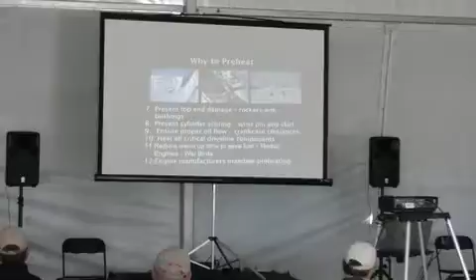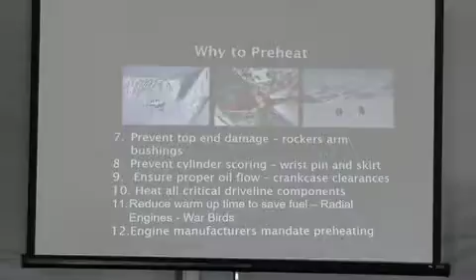And some of the things we don't think about with damage, rocker arms. We do a lot of testing, and you'll see some of the graphs that we've got in here and some of the other imagery that we've done with thermal imaging. But it's up to 15 minutes on a cold soaked engine before you have oil flow at the top of the rockers through the push rods. So you get a lot of damage that you don't see. You think that's just normal wear. If it gets overhauled, spin a bushing.

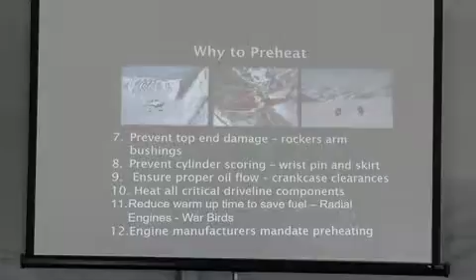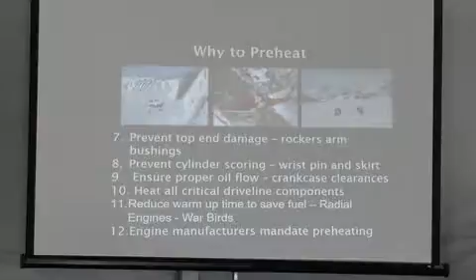And of course, cylinder scoring with wrist pin contact. We've kind of eliminated that over time. They've got better wrist pin manufacturing. And then I have seen skirts get galling on the cylinders from the shrinkage. Of course, proper engine oil flow, and then we heat all the critical driveline components. We use that primarily when we talk about helicopters. We heat everything in the helicopter, the main rotor gearbox, the engines, oil tanks, hydraulic reservoirs, to the tail rotor.

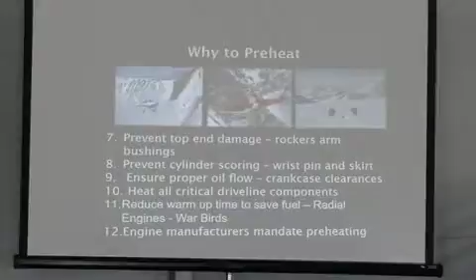And a reduction of warm-up time saves a lot of fuel. One of the examples I like to give is a radial engine, the 1340s that Kenmore Air uses with their seaplanes. They went from a 35-minute warm-up time to 5 minutes. So there's quite a bit of fuel savings, wear and tear, and everything else, because that idle time counts against TBO.

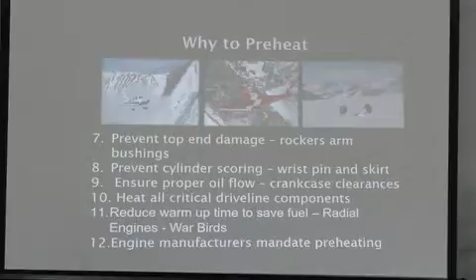And of course, engine manufacturers mandate engine preheat. If you look at the service information letters that TCM put out, Tanis actually helped them write that original service bulletin, which is kind of neat. And then Lycoming as well.

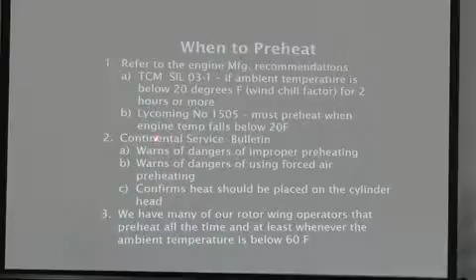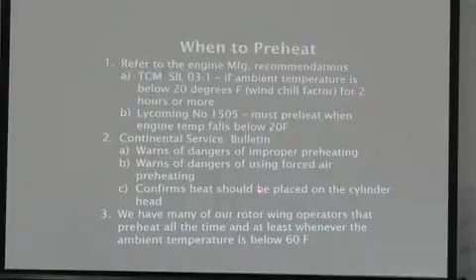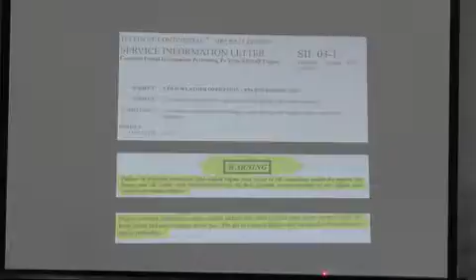And they give warnings of the damage that it causes and the proper types of preheat to use. Continental goes right down to saying that they want to see elements in the thermocouple well, because our first systems, of course, were located in the thermocouple well. Now we have elements that screw right in and replace one of the rocker cover fasteners, or you can put it into an intake tube location.

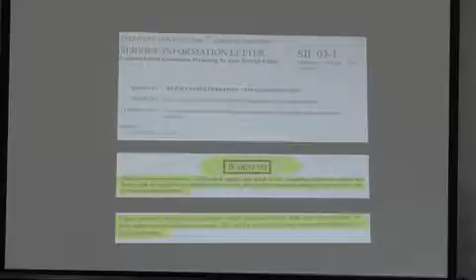And these, of course, are available to you online. You can look them up through the FAA site. Even Lycoming talks about it. Continental goes a little further. They say a cold-soaked engine is an engine that has been subjected to a wind chill of 20 degrees for 2 or more hours. So it could be 40 degrees out. As long as it has a wind chill, they're saying that that's a cold-soaked engine.

So what to heat? To preheat, of course, is a complete engine. All critical driveline components, gearboxes, accessory cases, things like that. The battery and also the avionics. Tanis has had avionics heaters for a number of years, and we just finally redesigned a heater that we've released, and we're doing more certification with that. It's included in all our STC systems with the turbines.

We're doing an STC right now for Kodiak for a Canadian customer, and that's going through completion right now, and that kit will be STC'd with that cabin heater in it. What that cabin heater does is that anything that's a glass panel, it doesn't light up below freezing. So you're essentially starting an engine without any kind of oil indication.

Last time I was up in Canada, I didn't realize I was flying a Saratoga with a G1000. I parked it, thought I was only going to be there for a few hours. The wind kicked up and I left it parked outside, and of course I was in there for 5 hours. I came out and I had to fire that engine up, not having a preheat on it, but more importantly in this particular situation, because I had a cover on the engine, I fired it up. I still didn't have oil indication because of the fact that the panels weren't heated up.

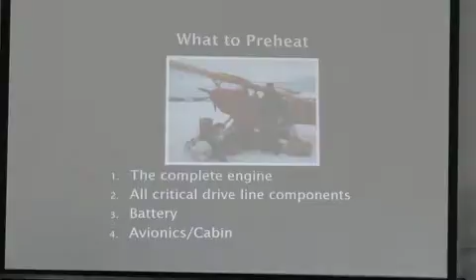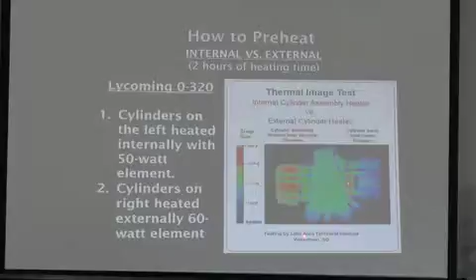So how to preheat? The way we do it is we heat the cylinder heads. This is a 4-cylinder example. It was done by Watertown. This wasn't us. This was done a number of years ago with a competitor's preheat system, a band system that was external, and you can see the difference in the heat rise. We use an element that's only 50 watts that screws into the cylinder head, and this is an example of a 60-watt element that's on the surface of the base of the cylinders.

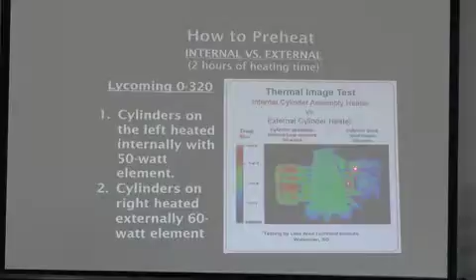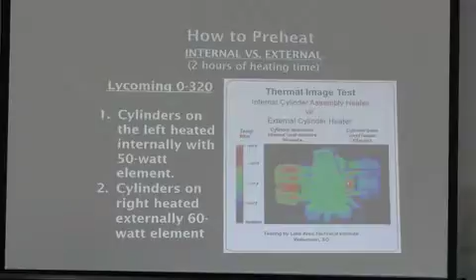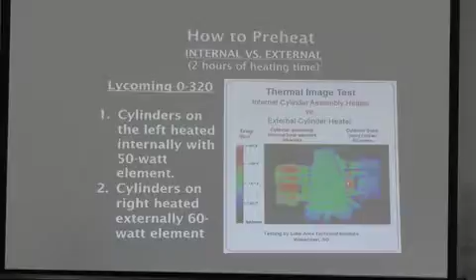Now, we did this testing probably 3 or 4 years before they came along with this, and I did it on my Bonanza. 60-degree morning, spring, I got to 3,500 feet, and we had a monitoring system on the aircraft, and I said, Pete, we're turning around, we're going to land. I'm not going to continue to fly here because the base temperatures of the cylinders had exceeded the TC data sheet recommended or required maximum temperature. So we never went down that path for a number of reasons.

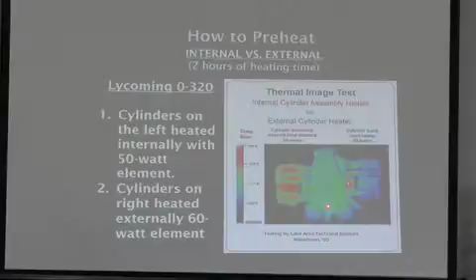The other reason is, of course, we like to heat the cylinder heads, and we'll get into some information on that as we move on here too. Other things to consider, depending upon how cold it is, and I've got some graphs that will show the difference, we get an additional about 40-degree rise over the engine temperature when you use an engine cover because you're containing that heat. So if it's very, very cold, we have operators in Canada that are certified to operate with their commuter airlines down to -54 with our systems.

Pilatus cannot be registered in Canada without a Tanis system on it. So the PC-12 has to have our system on it here in North America. Our systems, because of the way we design them, we use a minimum wattage.

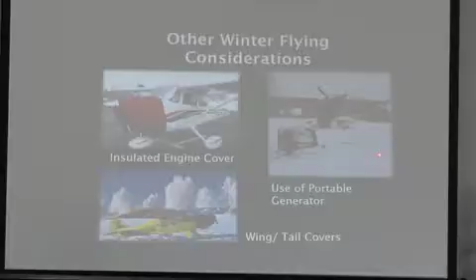To get maximum performance, you can use a simple 1,000-watt generator for a 4 or 6-cylinder system and just run it for 3-4 hours to heat up your engine. And then other things to consider are wing covers and things like that.

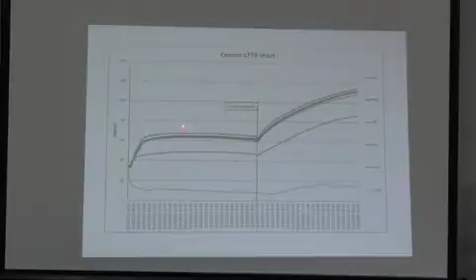Now this is a graph that we did, and we're continually doing testing. Just on a 177, and it happened to have a little 360 in it. What we're trying to do here is we got an ambient temperature, and we have a sump temperature. Then we have the cylinder temperatures here. And what this is a good example of, we shoot for a rise of about 60 degrees over ambient.

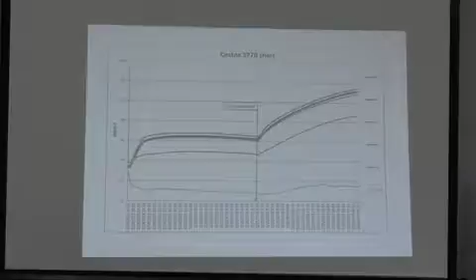We don't use thermostats or any kind of controllers on our system. It's designed for the mass of the engine. We want the excess energy just to bleed off. If we put thermostats on, we get cycling and we get a chance of the engine going through dew point. And when you go through dew point, there's a chance of moisture collecting. So once it's above dew point, you don't have a moisture issue.

And that's the other thing with heating the cylinder heads above the oil temperature. Nowadays, we just want the oil to flow. You got multi-viscosity oils, you don't need the oil to get really warm. You just want to get a temperature rise of about 40 above ambient for the oil. And then the cylinder heads, you want them to be hotter.

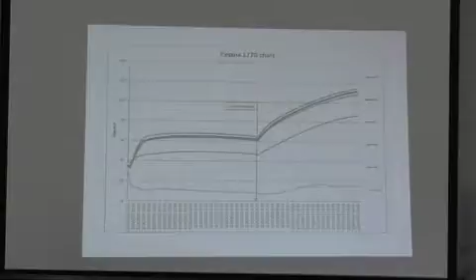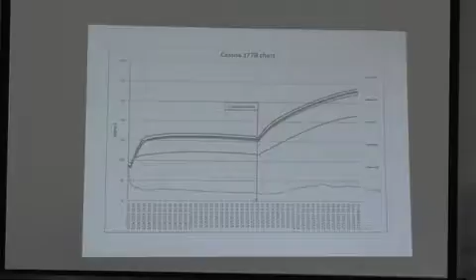We don't want to have a chance of a bunch of heat in the bottom of the engine and then cold cylinder heads, because somewhere between that heat in the center of the engine and the outside of the engine, that metal is going to go through dew point, and you're going to get a chance of moisture buildup and, of course, a chance of corrosion.

Some more graphing here that we did. This happens to be in a different aircraft. We had some extra probes put on it, but you can see the case are the blue ones here, and then here's the oil. So the most important ones to me are to look at the oil. We want the oil at a lower temperature than the rest of the items. We don't want to release the moisture in the oil on the ground. We want you to release that moisture when you're flying the aircraft.

Get the engine above 180, 200 degrees, your oil temperature for an hour or more is what they recommend from the engine manufacturers. Moisture does get in your oil as part of the combustion process. It blows by your rings, it gets entrained in the oil as it runs, so it is there. The preheat systems don't create the moisture, but they can release moisture that's entrained in the oil.

You can't see it. Sometimes you'll see on engines where you pull the dipstick, it looks like a milkshake. That's real obvious that you did not get the engine warm enough to get that moisture out of the engine. So we want you to release it in the air while you're flying, not on the ground with a preheat system.

Preheating that you select, if you have a different preheat system on, call us. I'll talk to you. I've been around doing this long enough. I can tell you how to operate that system. I'm not saying to pull it off. You know, if you have a sump-only system, run it for an hour, no more than 2 hours. Don't leave it on, because there's a myriad of problems that can happen with just a sump-only.

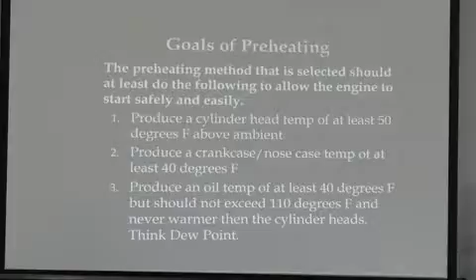We get associated with a lot of preheat systems. In fact, just about everybody's, I've been told, as a Tanis at one time or another. Everybody's riding on our wake because we've been doing this for so long. We are the first electric preheat system mounted on an engine. So consequently, we get associated with the good and the bad.

So what we're looking for, and I'm pushing the wrong buttons here, is we want to produce a cylinder head temperature of at least 50 degrees over ambient. We want to produce a crankcase and nose temperature and sump temperature of about 40 over ambient. And we definitely don't want the oil to get above 110 degrees.

Now the reason we're giving you 110 degrees, for example, if it's a 70-degree day and you've got that 60-degree rise, you're going to get pretty darn warm. So you don't necessarily need to have the system plugged in.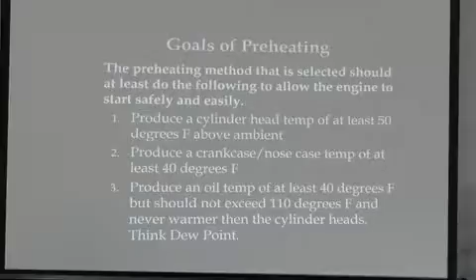Now our turbine systems, helicopters, EMS helicopters, just about every EMS helicopter in the United States and Canada has our system on it. They use those systems upwards to 70 degrees all the time for standby status. That way they can launch in 2 minutes. What we like to say with our helicopter systems is from off to liftoff in 2 minutes. Basically, once that machine is gyroed up, it's ready to launch. In the old days, it was 30 minutes to an hour before they could launch.

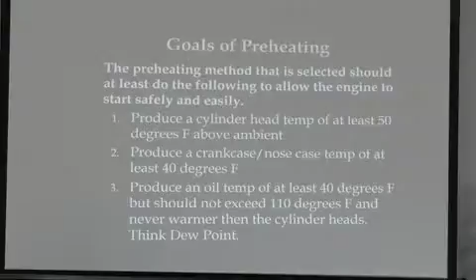This is the fun part here when we get into the idea of people thinking that our preheat systems create moisture. If you look at dew point, and I've got a good graph here coming up, what we're trying to do is get the delta between the air temperature and the dew point. We want to see a large spread between those two items. And I'll show you a graph here in a minute.

Probably the easiest way to think of it is water evaporates at any temperature. It even sublimates when it's frozen. You know, it disappears. So the rate of evaporation is the delta between the temperature of the water and the ambient dew point. So the greater the delta, the faster the rate of evaporation.

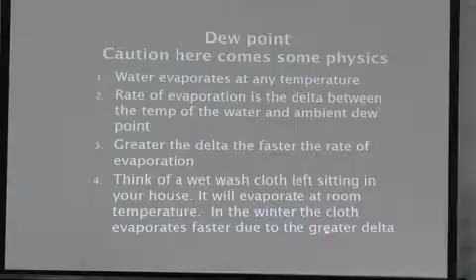So the neatest thing and the easiest way for us here in cold weather to think about is think of a wet washcloth being left out in your house. It evaporates at room temperature. And in the winter, the cloth evaporates even faster just simply because of the delta between the dew point and the ambient air temperature.

Our complete systems keep the cylinder heads and all other parts of your engine above the oil line. So we're talking above the oil line, nominal oil level, above the dew point, so the moisture evaporates, and if it does, it will not condense on the metal inside of your engine. So once you've got that engine warm, leave it warm.

What I like to say is, as soon as practical on a cold day, just plug your engine in. Plug in the preheat system after you get it in the hangar. Throw a blanket, moving blanket, sleeping bag, or if you have an engine cover, put it over the top. That way the entire environment inside of the cowl gets to the same temperature and it levels out. And everything underneath the engine cowl, even if you have a battery mount on the firewall, then gets warm.

We've designed our system in a way to heat the engine completely, so you can leave it plugged in all the time. There's a lot of misnomers out there that you can't. Our system is designed to be done this way. That's one of the reasons we've gone ahead and done the STC. Our system's not required to have STC, but we do that so we can sell in other countries, and it also tells you that we've done the engineering properly, and now we have a completely airworthy system.

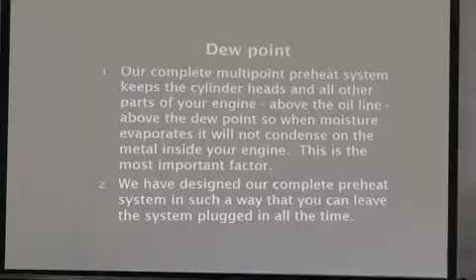Every component, right down to the connector and the wires. The wires that we use in there are 260 degree. It's Teflon, cage coated, mil spec. It used to be proprietary to Boeing, and just recently they released that, so it's got an abrasion rating and everything. The connectors are certified at 200 degrees centigrade. And I could probably go on for quite a while boring you with that part, but I'll skip that.

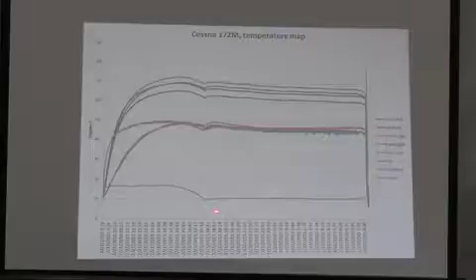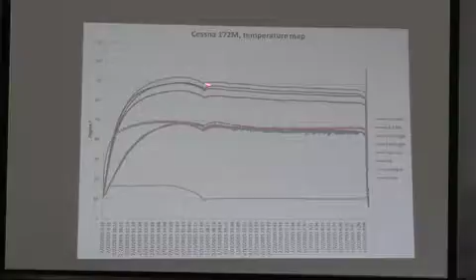There's another temperature graph that we did on a 172, and here we've got some information. This is the ambient. Our cabin heater is here, so it's kind of mixed up in this. And then these are your case and sump readings right here. So your oil temperature and the bottom of your sump and the cylinders. Again, we have that spread, and that's what we're looking for.

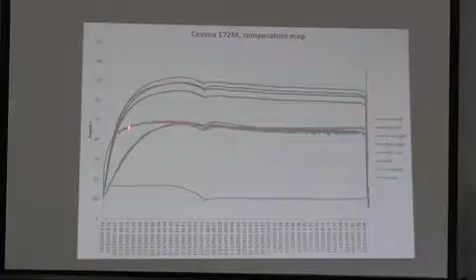It's critical enough to where this graph is kind of interesting. This was done in a hangar, and it heated up, and somebody opened the hangar door, so you see the dip in the temperature here, and then the slow rise again, and the hangar door was never closed.

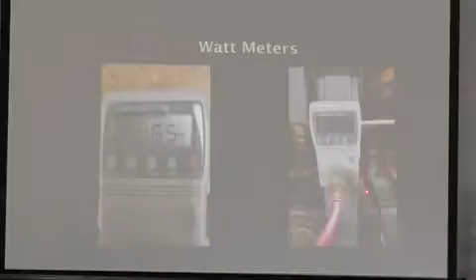One of the ways you can check the health of your system, we have simple meters now. Our systems don't use a lot of wattage. It's not 800 or 1,000 watts on a 6-cylinder, it's 465 watts. And our 4 cylinders are only 240 watts. And they're designed that way specifically.

So some of the FAQ about Tanis aircraft is, does engine preheating cause moisture that results in corrosion? So those are some of the things. If you guys have questions, feel free to interject in here anytime too.

How long does it take to preheat? Our systems are designed to reach a maximum saturation in 6 hours. After 6 hours, that energy just bleeds off. Unless, of course, you put an engine cover on it, then you're going to get another rise of about 40 degrees, depending upon the insulation of the cover.

And an engine cover doesn't have to have a lot of insulation. Just needs a little bit. Doesn't have to be like a big, thick, fluffy sleeping bag. Just needs enough insulation to break that wind so that it's not sucking the cold air through that bare aluminum or composite cowl.

Somebody have a question? I thought I heard somebody there.

How much electricity? How much does it cost to use? Depends on what your charge is per kilowatt hour. But at 12 cents an hour, which most people get charged around here, if you're even charged in your hangar, it's roughly $1 something a day for a 6-cylinder and just under $1 for a 4-cylinder.

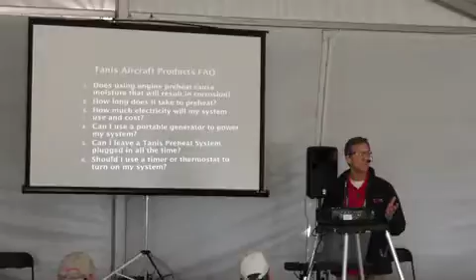On an O-320 engine, I couldn't hear that. What? On an O-320 engine, your system, is that like a 275 watt system? Okay, the question is on our 4-cylinder systems? Yeah. The STC systems we sell now are 240 watts. Your older systems, we had a 50 watt element on the sump, so they were 250 watts. We do have some other systems people have purchased for a special application that might have a little more wattage, but generally it's 250 watts.

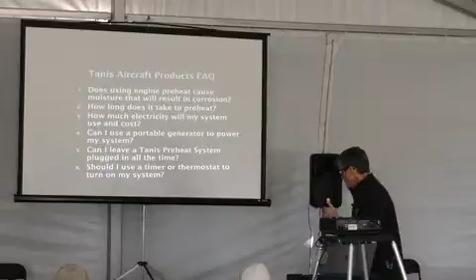And if you go online, everything we've got is available online. All our installation instructions, whether it's a Bell 429 or a little 4-cylinder Continental, are available online. Probably the best thing you can look at is the ICA for the piston engines. There is Ohm's law inside of there, and there's a systems check. It'll tell you how to read it with an ohm meter, so you can do a check on it and record that information in there, and then also print out the operating guide. It'll tell you how to operate the system.

On the front page you can put the wattage, and the reason we do that is because if you sell your aircraft to somebody, and somebody says, do I need a generator, or you forget in a couple of years, what's the generator output I need? What does my system draw? What extension cord do I need? All that information is right on the front of the operating guide.

The reason I asked, we do ice fishing in Oregon, and I have people who went, and we can run two heaters on the generator. Yep. And it works fabulous. Perfect. Well, thank you. Yep. Yeah, you need, say, a 1,000 watt generator. It can put out continuous about 75% of its maximum output. So 750 watts roughly.

Can you leave a Tanis plugged in all the time? We just went over that, and yes, it's designed to be left on all the time. The way we use our systems on the aircraft we fly, and tens of thousands of our customers, when it gets cold, they start plugging the system in. As soon as practical after they land, they just plug it in. I mean, if you're worried about a couple bucks a day, it's only really for 3-4 months out of the year that you're going to be doing that. Some people might run it, if you're in Canada, 6 months out of the year.

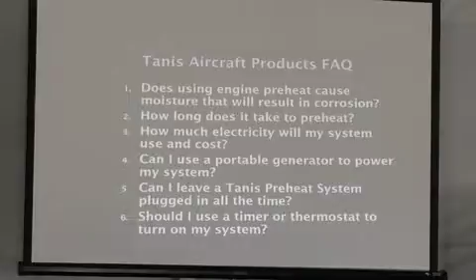Should I use a timer or a thermostat on your system? No. We do not want that thing cycling by any stretch of the imagination. Get it above dew point, leave it above dew point.

Probably the best story I've got is I had a guy call me a couple years ago and he said, I had to tear my engine down. I said, oh great, another one of these guys that thinks he's got a Tanis on and he's got corrosion. He says, no, this isn't a bad story. I got a Comanche with a 540 in it, and I'm in the military. And I got stationed over in Europe, and I didn't come back for 3 years.

Before I left, I'd had my aircraft plugged in with the heater going. And at the time we had a VBR, which just circulated air through the crankcase. He left it on for 3 years. And the reason he called, he wanted to let me know, his mechanic called and said, how did you preserve this engine? It's in perfect condition.

You just shut it off in the hangar, you didn't put any special oil, you didn't do any preservation at all, and here we've got an engine that has absolutely no corrosion, all the gaskets are so flexible and everything. Only reason it had to be torn down, it had a crankshaft AD.

But don't use a timer, don't cycle it. Don't use a thermostat, most importantly. Most thermostats have quite a variance. If you want it to come on at, say, 40 degrees, it's really coming on at 45, or at 25 and turning off, or 35 and turning off at 45. So it's going to be dipping, and we don't want to see that happen.

If you want to use some kind of a cell switch or something, that's fine. Not everybody flies enough to take advantage of it. Here in the winter, if the engine's frozen, obviously if there is moisture that got into the engine somehow from flying it, it is not going to rust because it's frozen. But again, the way I recommend it, just get rid of the gimmicks, make it simple, and just plug it in and use the system.

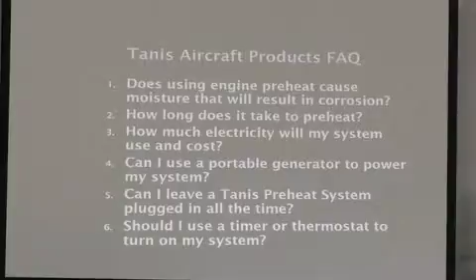I got a question. I don't fly a lot in the winter. Sometimes it goes a lot of weeks. When I get to the flat, in the hangar, put a cover on it, plug the Tanis in. But I got one of these deals I can call off my cell phone. I'm going to fly today and I turn it on for 6 hours or so. Is that okay? Perfect. Okay.

If anybody ever has a question, even in the summertime, when you go to check your oil, you see water dripping on the filler or on the dipstick. If you're worried about it, like a Lycoming and the Continentals that have the oil dipstick on the filler, just loosen it up and cock it off to the side, throw a rag over it or something like that. You're going to pre-flight it and you're going to tighten it up anyway. But that'll let anything expel. And that's usually what I tell people to do if they're worried about it.

So we talked about how long it takes to heat, 6 hours. The Continental service information letter they sent out said they don't want to see a system plugged in more than 24 hours prior to departure. That's because they're covering every preheat system that's made out there. They cover their backside.

Continental's now working with us, not only with their diesel engines, but with installation at the factory, not just at Cirrus, because they're owned by the same people now, but at all the other manufacturers. So they want to start recommending our kit, and we're hoping to see that come to fruition here pretty soon.

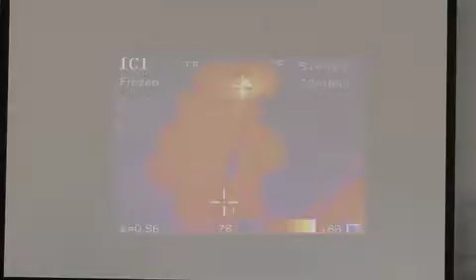So we continually, yes? Did I miss one? I haven't done this in a long time. Usually Doug does this. Which one?

Our systems are designed, even the helicopter systems, to get the rise of the item being heated to about 60 degrees over ambient. So I shoot for, when I'm doing my engineering, between 50 and 70 above ambient. I'll give you some examples. We did some work on the Q400, and then we did the Q300. Bombardier sold some to Russia. But the requirement was, before they purchased the aircraft, 4 of them, they had to have Tanis systems on them. So we sent our systems we designed, and on this particular aircraft, it was with the Pratt & Whitney 150s, which is a pretty good size engine, and the batteries they wanted heated. So we sent our system over. They were installed in Bermuda, of all places, and then flown up to Siberia, and they did the testing. Our systems heated the stuff up at minus 44 within 1 degree centigrade of what our design parameters were. So we do a pretty good job with that.

And they had to have 3 batteries heated on that. So they've got an emergency backup, an avionics battery, and then a primary battery for start. So to answer your question, we're looking for about a 60 degree rise above ambient. The additional heat just bleeds off, unless you're sitting in the wind or something like that.

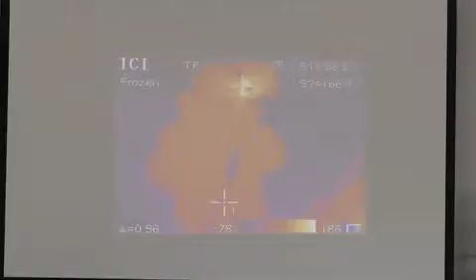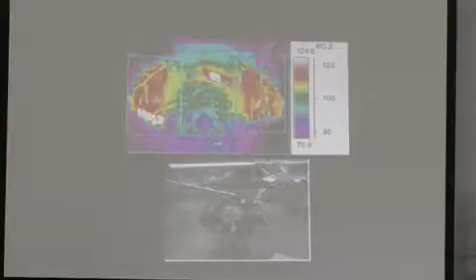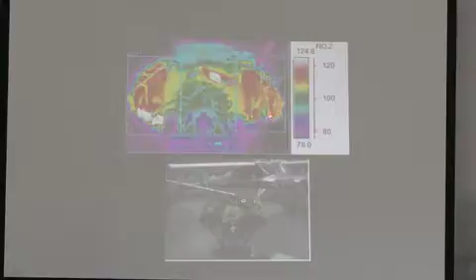We're continually doing testing. We just purchased a new high resolution thermal imaging camera, and we're doing a little more testing with that. This is one of our older cameras. Right here, Bulldog gave us a pair of engines to work with, and we're doing some testing on it. It's a 520 out of a Baron that the guy had overhauled, and this is on the floor. It doesn't go in the Luscombe in the background. I'm sure the guy would love to have that in there, but you can see what we're heating with the cylinder heads. This is just looking head on at this engine with the thermal imaging camera, so you can really see where the heat is. We can't see the underside because it's shadowed, so it's not reading, but there's the top element on the top of the case. It's located right here. And then, of course, the cylinder heads. So we want to know what our systems are doing.

Some of the things we've changed our system with here, we've done some improvements. When I came back to the company 8 years ago, I said, we've got to change the wiring and we've got to change the connectors. And so we spent a couple of years researching and finding better wiring for that, better cabling, and of course sealed connectors to get rid of the old spade connectors that we had.

When we started this, engines didn't have wiring except for maybe ground leads for mags, ignition leads, and maybe something going out for an oil temperature sending unit. That was about it. Now we have a myriad of wires running in the engine compartment. So it's been an evolutionary process, and the requirements are much higher than, say, for an automobile. So a lot of these components aren't readily available. They have to be specially made. So that's one of the things that our system has evolved to do, is to compensate for that.

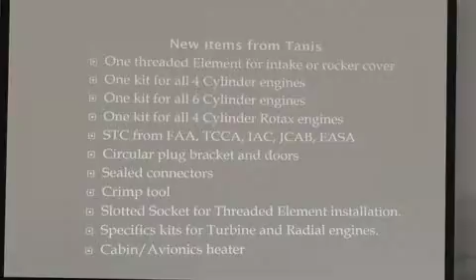And it's allowed us to reach into and become part of the commercial market. So we're not installed just on GA aircraft here in the US, where we started with small piston. We're installed on all the Canadian government's aircraft except for a few of their jets, from 172s that they fly to the BO-105s, and now the 412s that are going on the icebreakers.

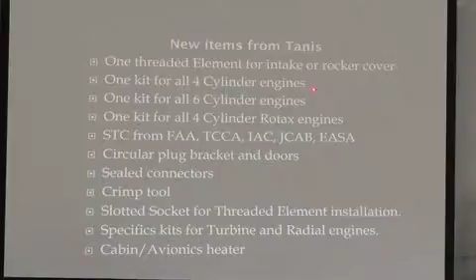So one of the things we did here recently was I did a complete metallurgy. How can I say that here? Went through the metallurgy of the bolt that we had, and I found a better way to make it. And we came up with a CNC process for making all of our threaded elements now that replace the thermocouple CHT element that we had, and also the intake tube bolt.

It's a better material. It's increased the strength of it by twice. So it's twice as strong as it used to be. It's a stainless steel 17-4 material. It's an aerospace fastener material. Costs us a lot more to make, but it's a lot better part. And of course, I talked about the wiring and the connectors that we've done too.

We now have one kit that fits all 4-cylinder air-cooled engines. And we also have only one kit that fits the 6-cylinders as well. It leaves all the CHT wells open. It's STC. It can be sold in Canada and EASA installed around the world now. EASA approval, of course, is a European approval.

And then we have one kit that fits the Rotax, whether it's a 412 or, I'm sorry, is it 912 and 914? And now, of course, we have STC approval from the FAA, Canada, Russia, Japan, and EASA is our latest one.

We have some accessories you can purchase. We have sealed circular plug brackets for the Lycoming, which is real common. And then we also have 3 or 4 different doors that are structurally sound that you can put in with field approvals if they're not already included in the STCs. All our connectors are sealed now. We have special crimp tools that are inexpensive you can buy from us to work with our wiring.

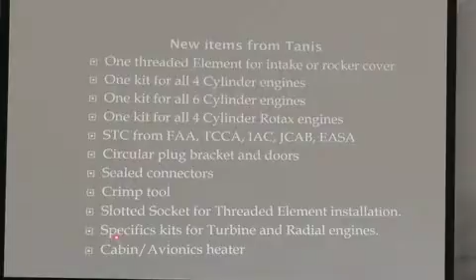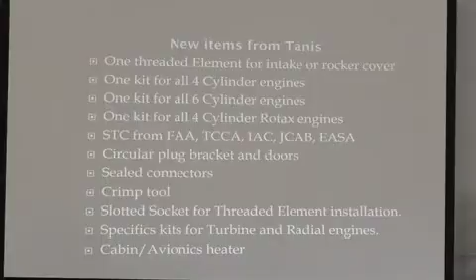If you've got a more complex system where you need to make modifications, or a splice, even in an older system. We do have the slotted socket that we sell, and I really promote the use of it for installing our cylinder elements in the intake tube location, so you can use a 1/4-inch ratchet and properly torque it to the factory specifications. We have specific kits for turbine and radial engines, helicopters, and then of course we have cabin avionics heat as well.

And that's all I got. Yes, sir.

If you go by our booth in here, the way I recommend installing is like a TSO radio or something. Go to 43.13-2B, not 1B, and just look at the first chapter, and it kind of goes through that. It gives you examples of how to install radios in existing panels, or structural components in the aircraft. And the same certification process applies for that as well. We have a pretty good instruction to walk you through that.